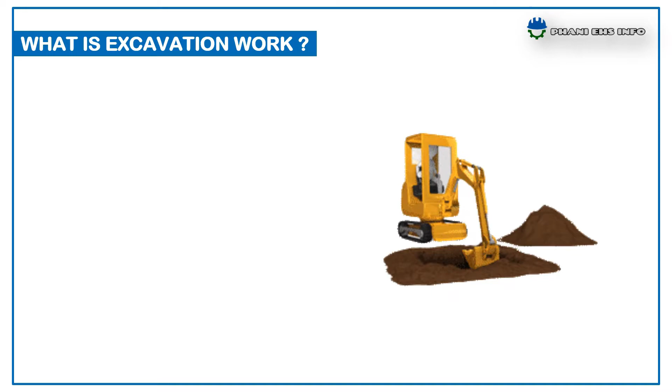Today I am going to talk about excavation safety. First of all, what is an excavation? Excavation is a man-made cut, cavity, trench or depression formed by earth removal. Excavation failures are particularly dangerous because they may occur quickly, limiting the ability of workers to escape, especially if the collapse is extensive.

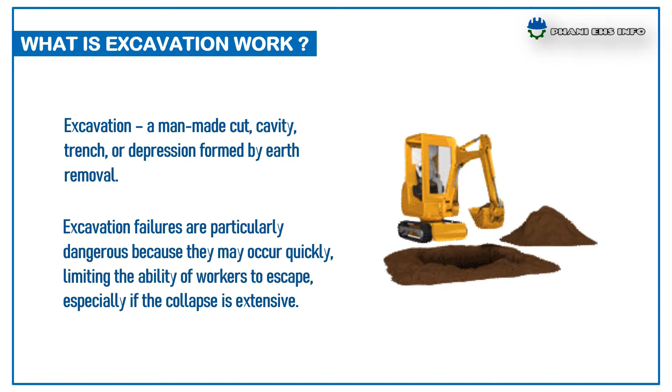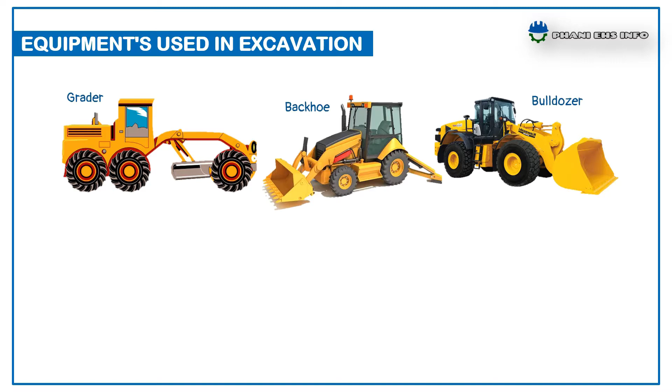The main equipment used in excavation are grader, backhoe, bulldozer, wheel loader, rock breaker, and pneumatic hammer. Let us see hazards at excavation work. Water accumulation. Being trapped by the collapse of an excavation.

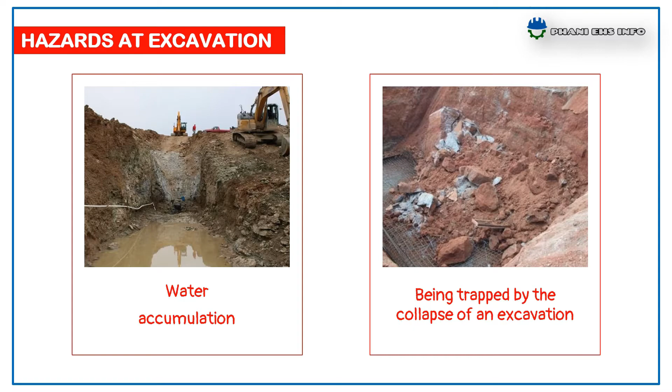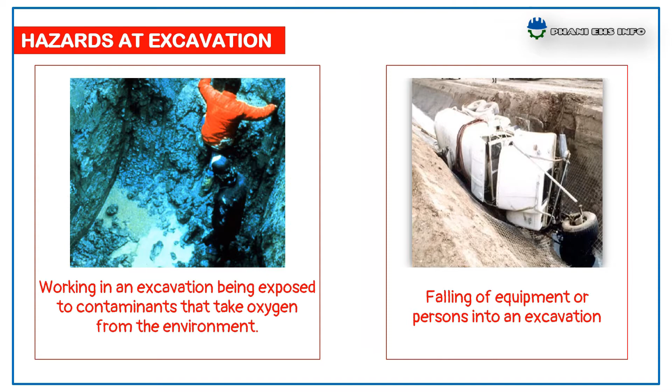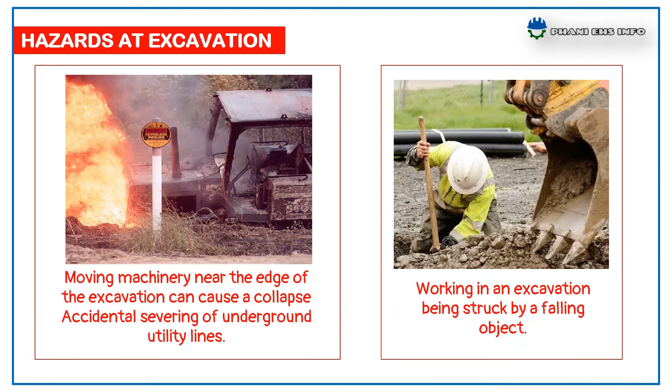Working in an excavation, being exposed to contaminants that take oxygen from the environment. Falling of equipment or person into an excavation. Moving machinery near the edge of excavation can cause a collapse, accidental severing of underground utility lines. Working in excavation, being struck by falling object.

Now, what are the safety controls at excavation work? The first control is to get approvals like work permit clearance, risk assessments like job safety analysis or activity risk assessment, and a standby supervisor. Then engineering controls. These engineering controls include sloping, shielding and shoring.

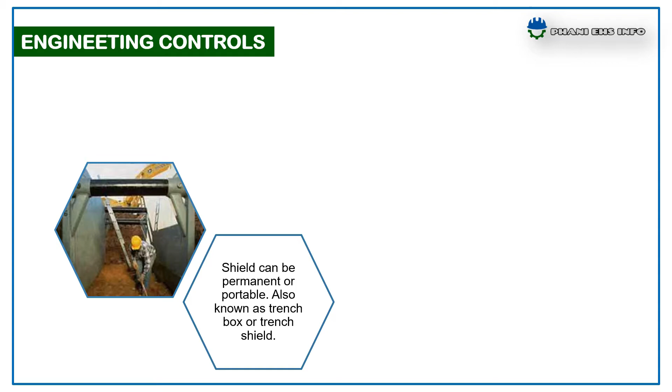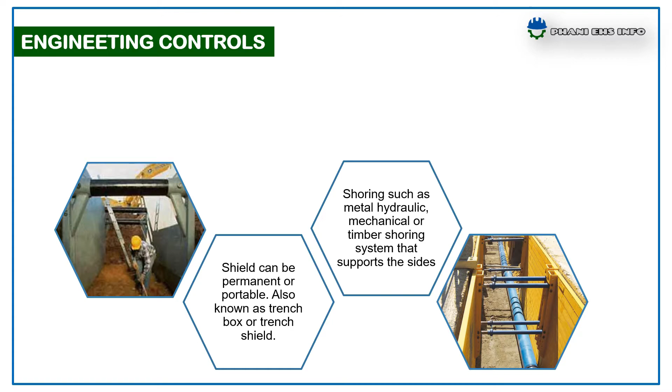Shield can be permanent or portable, also known as trench box or trench shield. Shoring such as metal hydraulic, mechanical or timber shoring system that supports the sides of excavation. And sloping, cutting the edge back in an inclined manner so that it will not slide into the trench or excavated area.

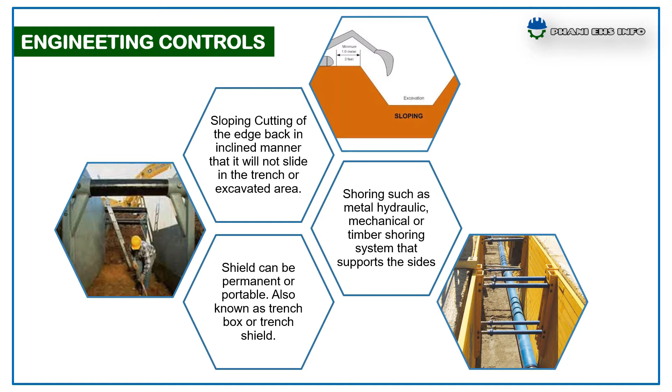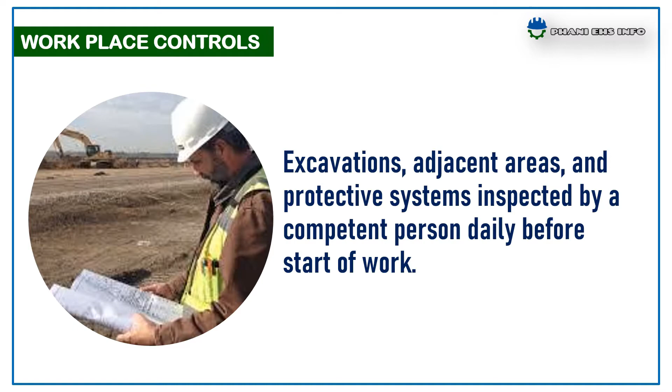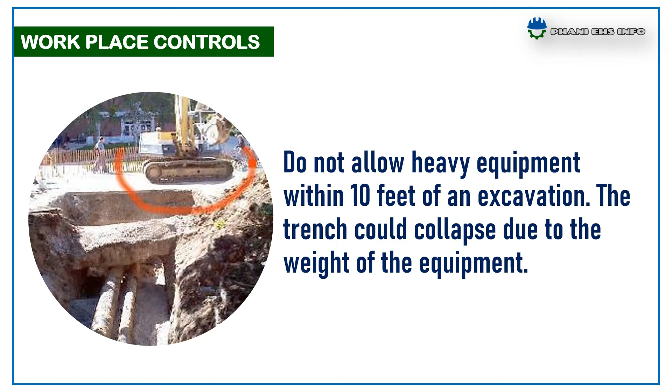Workplace controls. Excavations, adjacent areas and protective systems inspected by a competent person daily before start of the work. Do not allow any heavy equipment within 10 feet of an excavation. The trench could collapse due to the weight of the equipment.

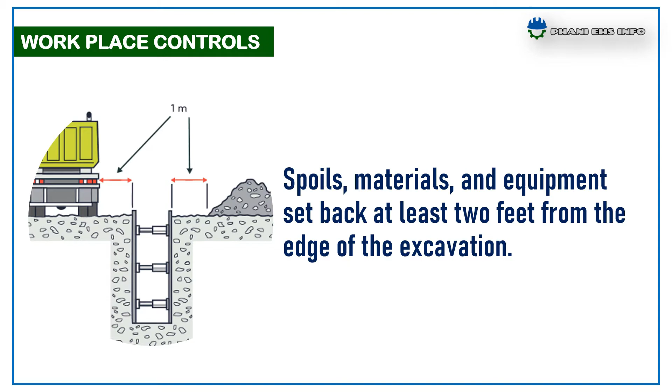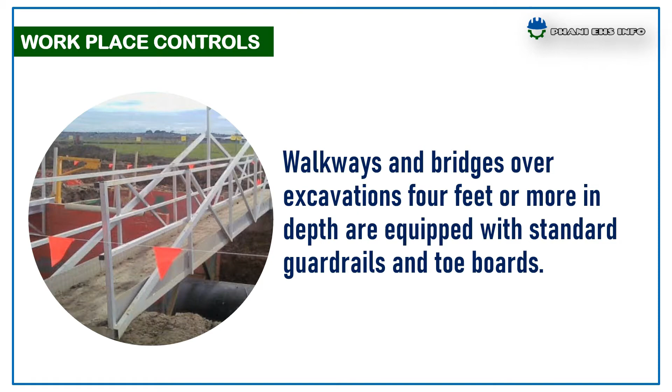Spoils, materials and equipment set back at least 2 feet from the edge of the excavation. Walkways and bridges over the excavation 4 feet or more in depth are equipped with standard guardrails and toe boards. Make sure there is a safe way to enter and exit the trench, such as ladders, ramps or steps.

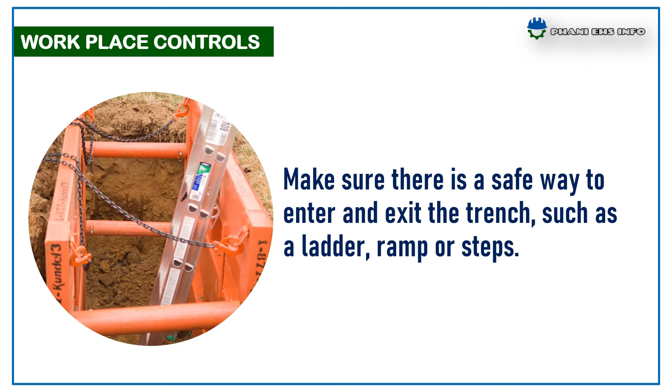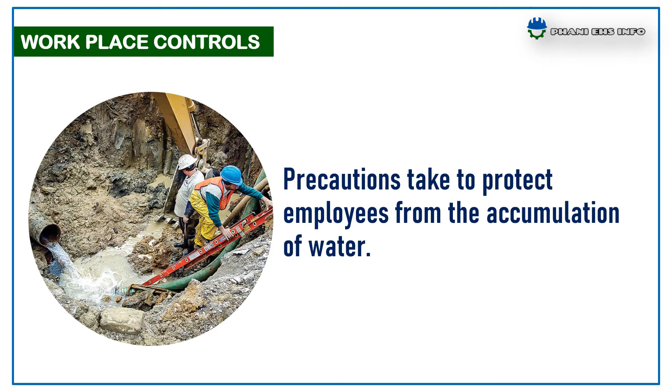Precautions taken to protect employees from the accumulation of water. Atmosphere within the excavation tested where there is a reasonable possibility of oxygen deficiency, combustibles or other harmful contaminants.

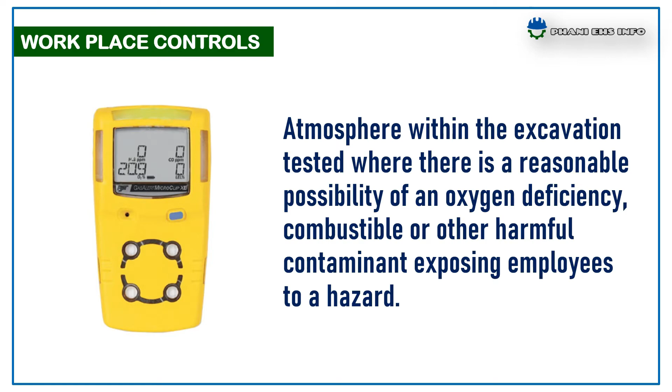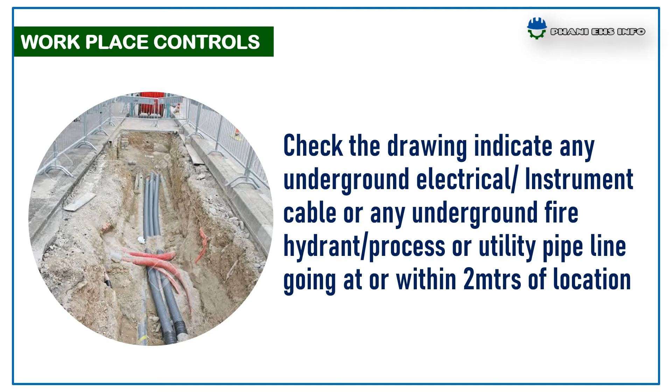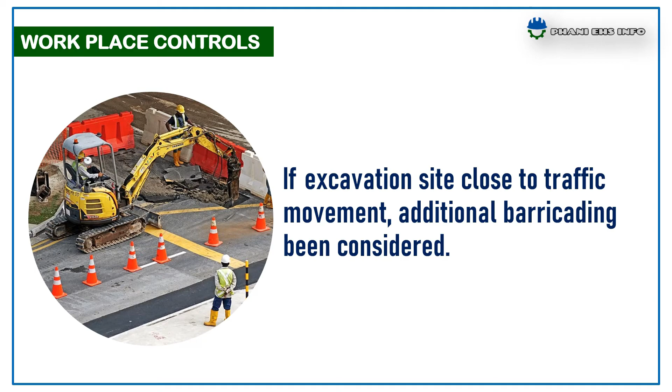Check the drawing indicates any underground electrical or instrument cables or any underground fire hydrant or process or utility pipelines going at or within 2 meters of the location. If the excavation site is close to traffic movement, additional barricading is considered. And PPE, personal protective equipment, warning vests or other highly visible clothing provided and worn by all employees exposed to public vehicular traffic.

Let me summarize this session. Check the excavation each day before starting work. Provide safe access to get in and out. Prevent collapse by shoring, shielding or sloping. Prevent people and material falling in with barriers. Avoid underground services. This is about excavation safety.